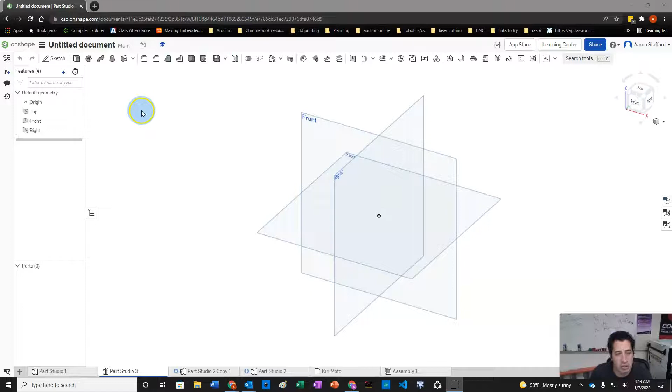Okay, so in this lesson, we're going to look at creating just a really simple object using the laser joint feature. What this allows us to do is create a type of finger joints in parts that allows us to puzzle fit them together. It's a really useful tool, and it's great for things that are made of multiple parts.

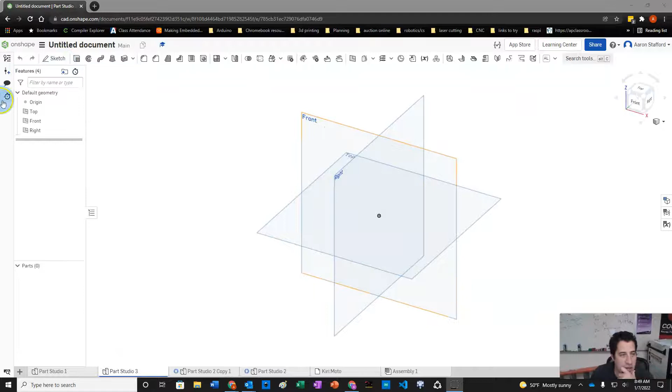And so we'll start here just by making a simple shape. Well, actually, even before we do that, we want to set the thickness of our material. So I'll create a variable called thickness, and we'll set the thickness to be 3.23 millimeters. Again, depending on the assignment, whatever material is available, I'll let you know the thickness for that one. So we have our thickness set,

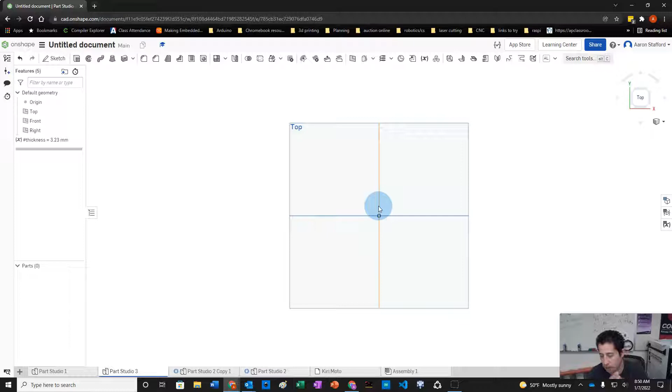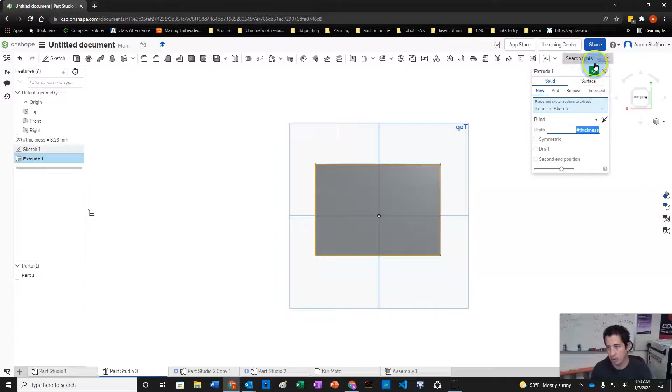and now we're going to start by creating a shape. The key here is that any place we want there to be a laser joint or this kind of box joint, we have to have the edges be overlapping. We'll do a really simple one first, just of two pieces. So we have a square, and we'll extrude that to the thickness of the material. This square could be whatever, or not a square, but kind of a rectangle.

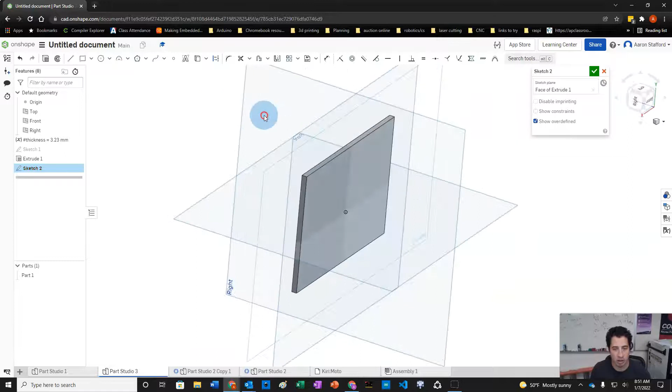What we want to do is make another piece that essentially intersects this one, and the place where they intersect is where that joint will be created. So we're going to make a sketch on this plane, and when we create the shape here, we're going to extrude it through this object. We'll make what would be a wall, facing a different way. So instead of extruding it to the thickness, we'll set the width of this, getting our dimension tool.

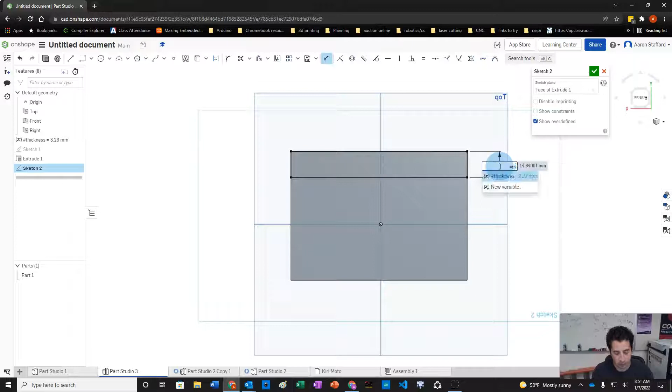We'll set the thickness here, and then from there we're going to extrude. Now the key is there's two things. First of all, it's important that we're adding a new object instead of adding, because they have to be separate pieces. These are two different parts that are going to fit together. And then we want it to extrude through that other object.

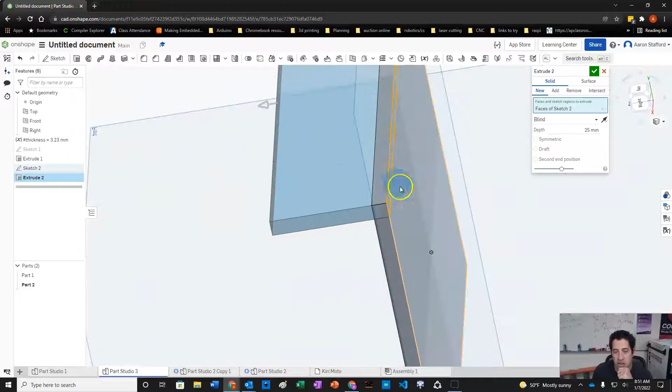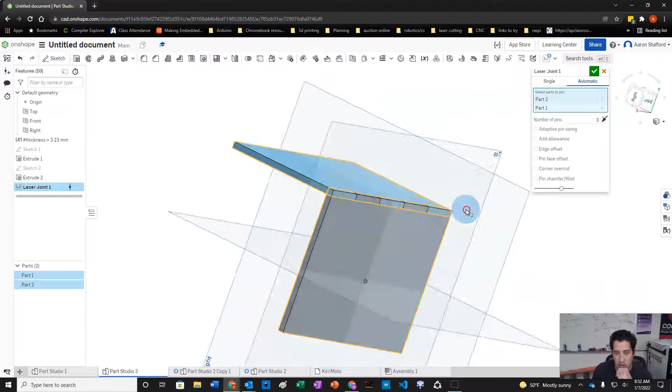So now we see that they're overlapping here, and that's the key for us to be able to do the laser joints. Now we have these two overlapping objects, and we can use our laser joint feature. We're going to choose laser joint, go automatic, and just click these two pieces. And you can see it generates those laser joints for us.

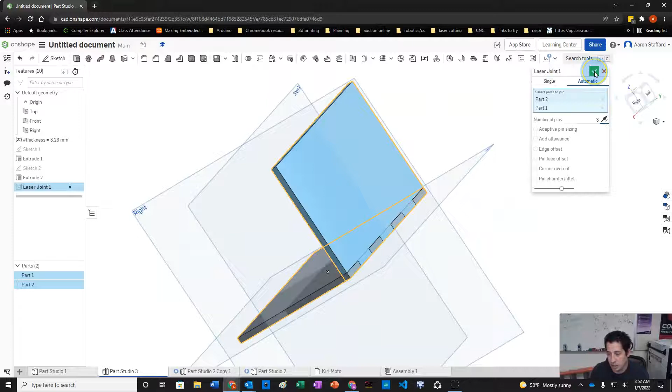We can actually change the number of pins if we wanted to, like make them really small, or bigger ones. The standard here was 3. You can also flip which one's outside or inside. Okay, and that's really all there is to it. It's maybe easier said than done.

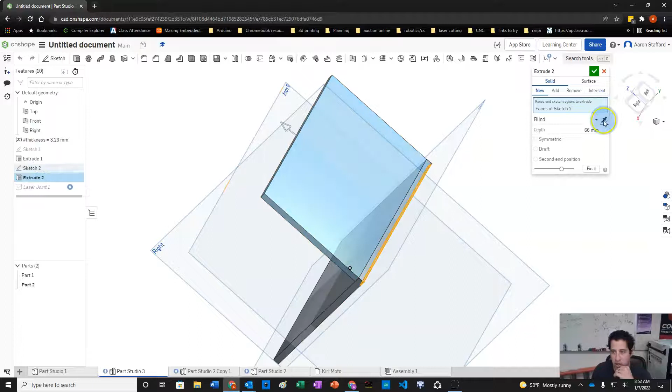Just a quick reminder, if we were to instead say add instead of a new extrude, no laser joints occur because these are the same part now. So it's really important that that happens. Also, if I extrude it this way where they're not overlapping, we also don't get laser joints because they're not intersecting each other. The laser joints can only occur in places where those objects intersect. So it's important that we get those joints in there like that. Okay, so that's two pieces.

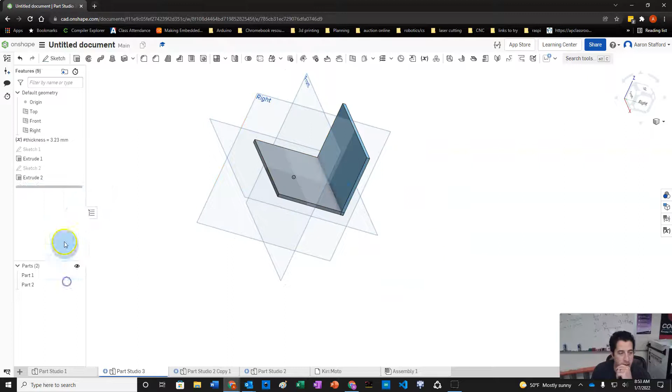Let's go ahead and back up here, and we'll add a couple more pieces. We'll turn this into a box. If I want to make this a box, I can't draw all 4 sides at once. I have to do 2 sides at a time, otherwise they're going to extrude as all one piece. And I have to extrude each side. Since it's a flat material, we have to extrude each of them separately.

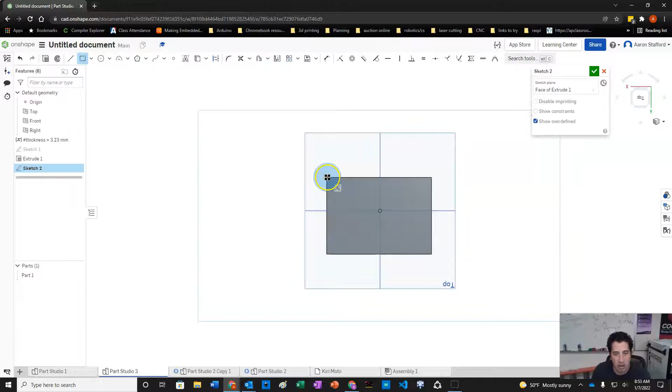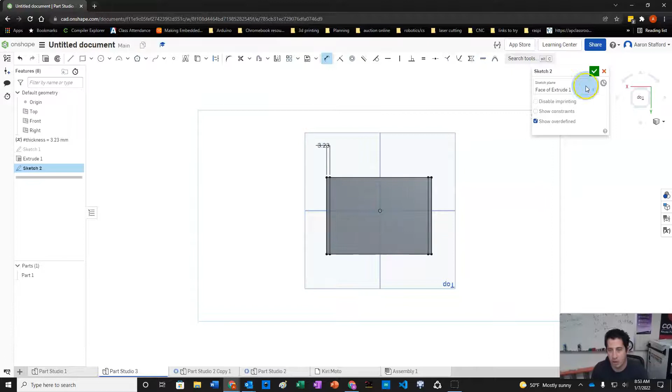So we're going to snap to the corner and snap to that corner there. We'll snap to this corner and then snap to that edge there. And we'll use the equal constraint to make each of these the same. Then we'll set our thickness using the dimension tool, press the letter D. We'll set our thickness here to be the thickness of the material. All right, and for the height of our box, we'll extrude this.

And so we want to make sure we extrude a new extrude, and it goes through. So here we see it going through the material. And we'll extrude it to a height, say, of 75. Okay. And now we have 2 walls here.

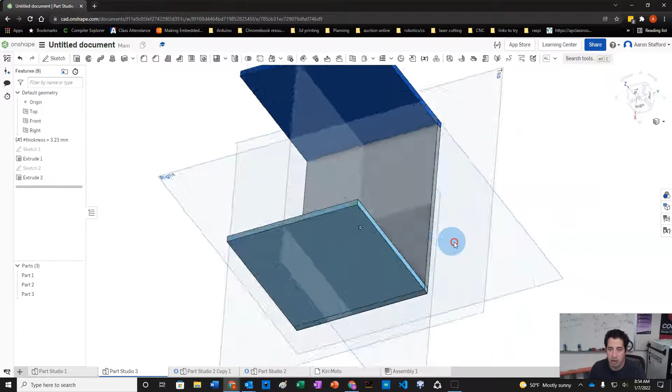Okay. And now we have to do the same thing. We've got to make 2 more walls. So I'm going to make a new sketch on the same plane. You notice I'm doing it on the bottom of the box so I can extrude through the edge. And we'll just go from corner to corner, just like we did before.

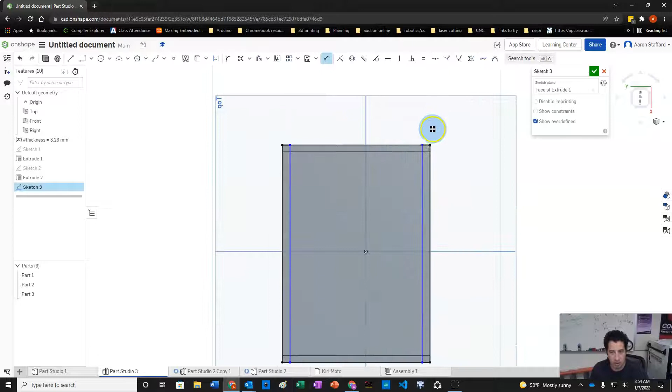Alright, we'll set these to be equal. Press the letter E to get the equal constraint. Press the letter D to get the dimension constraint. And dimension this to be the thickness. Okay, now we'll extrude this. We're going to choose selected new. We're going to extrude it the same distance.

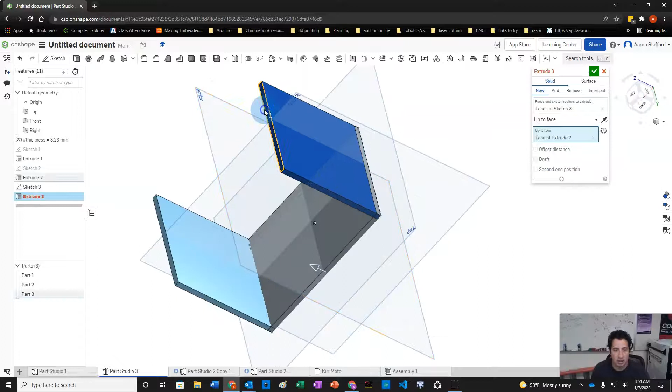Instead of setting it though, I can do up to face. And I can select this face here. Okay, and now we've got it. So we've got our little box here. We'll go ahead and add a top or a lid to our box, so it's completely closed off.

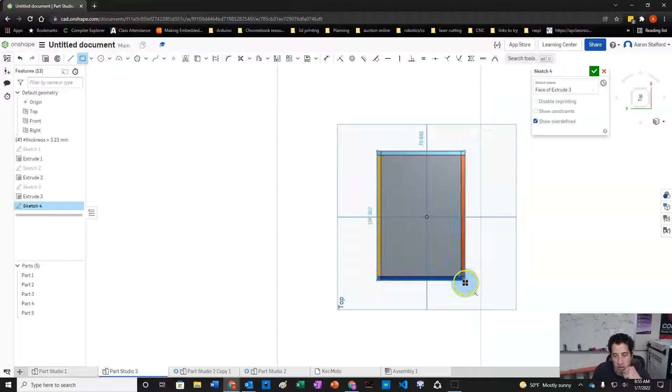So we'll make a sketch on our top surface here. We'll choose one of these edges, and we're just going to make this start in this corner and go all the way to that corner. Okay, and then we're going to extrude. We'll use the thickness here. And you see it went up, we want it to go down, so it's intersecting it. So now we have all these parts intersecting in the corners.

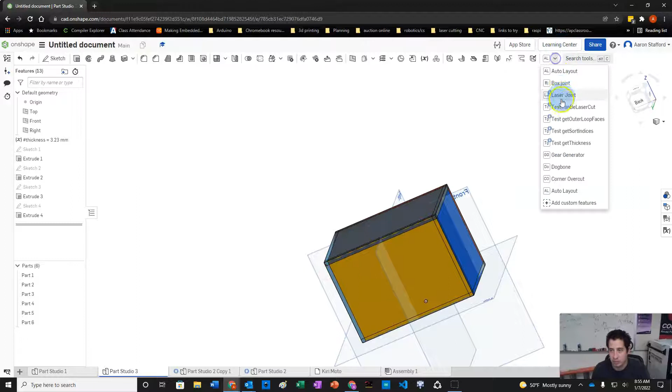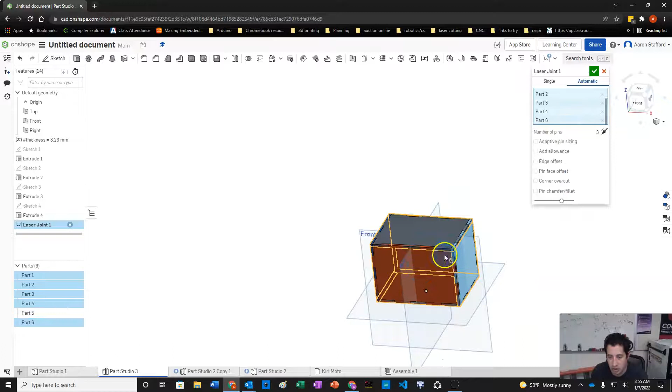And so we'll add our laser joint feature. We'll do automatic, and we're going to select 1, 2, 3, 4, 5, 6 parts. Okay, and you can see it generated those laser joints in all the parts. Now from here, if you want different edges to have different amounts of laser joints, we could deselect 2 of these faces here.

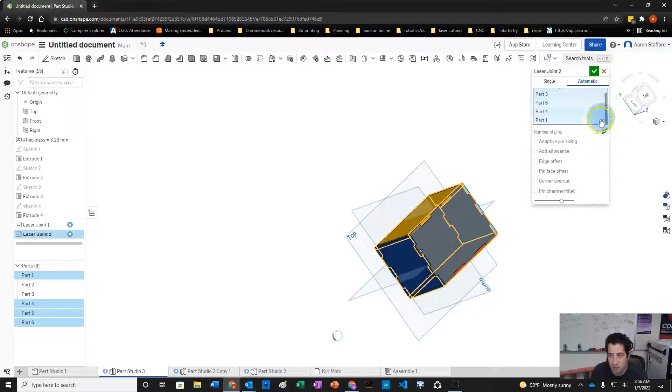And then we could come back and then do another laser joint feature if we wanted to between, maybe you wanted to have like 6 pins here. Something like that, and then you'd have to go back and create one more laser joint feature for these guys. And set it back to 3.

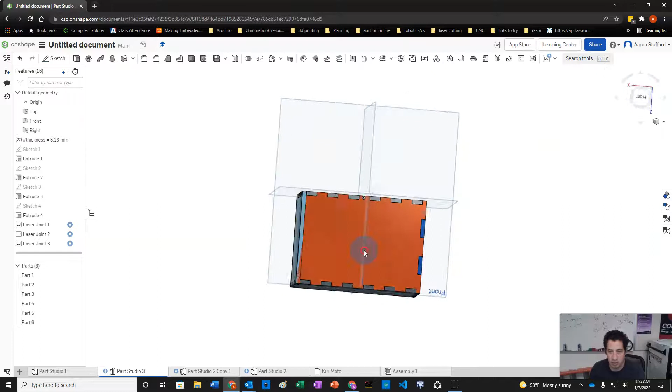So obviously that was a little bit more complicated. Did that work? I don't know if that worked. I think I lost some of my pieces. Oh, gotta do automatic as well. Okay, and there we have it. So the laser joint's done.

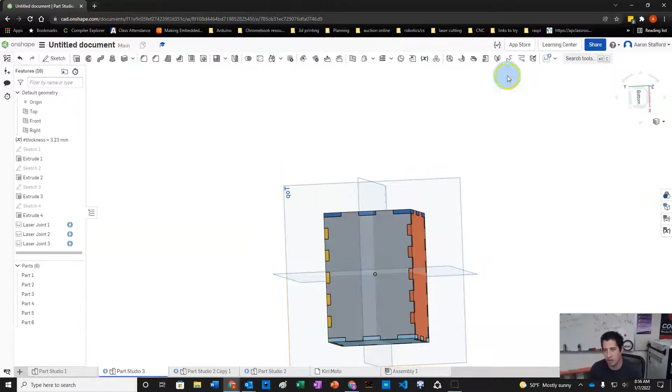Now to manufacture this, we have to lay them all flat, and this is where this auto layout feature comes in. We'll just set the cut sheet to 1000 by 1000, and the thickness we're going to set to be the thickness, and we can set the spacing. If it gives you an error, you might need to change the spacing. But now it laid it all flat for me.

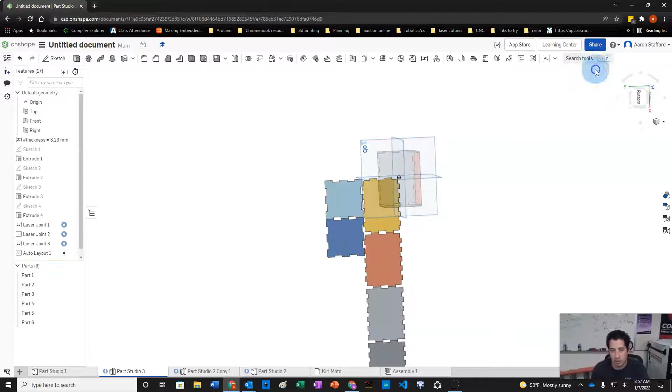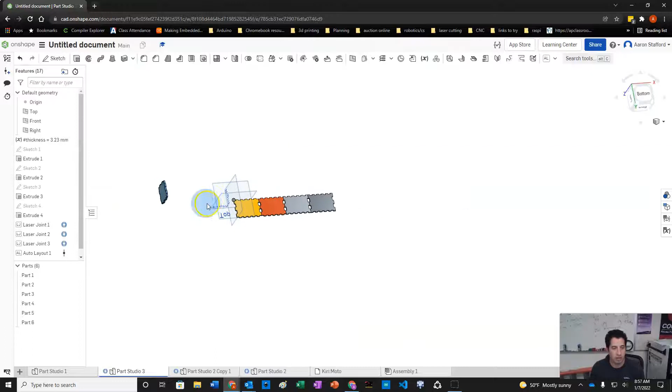And so something else that will come up here is if you have set something to be the wrong thickness, it won't behave the right way. So let's say here on sketch 2, I set this to be 5 instead of the thickness. So those are too thick now. When I do the auto layout, it's not gonna do it. It's gonna get confused with at least one of these pieces. And so if the auto layout feature is not working right, that's a clue that maybe the thickness of something was wrong, and you have to go back and fix that.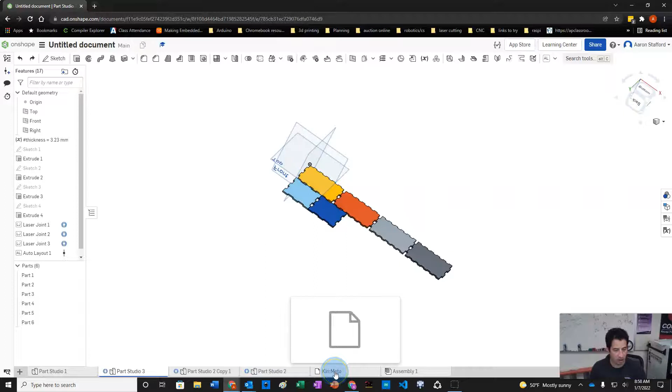Okay, so from here, we're going to send it to Kiri:Moto. I have one here added. You might have one from before, but you can click the plus, click the Kiri:Moto, opens up a tab. We'll go ahead and clear out this guy. We're set up with a laser, so our device is the laser, right? You can change that here. But yeah, we want to be under laser with the settings that we added.

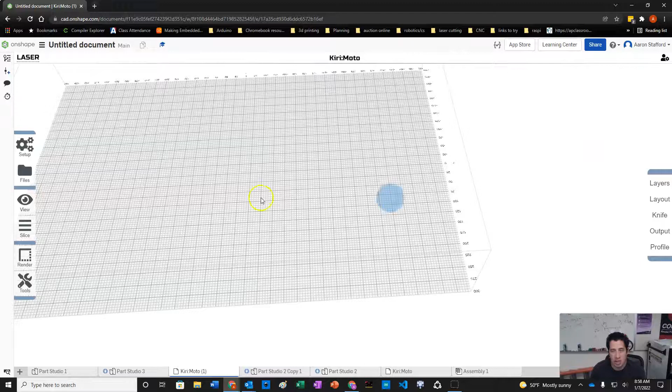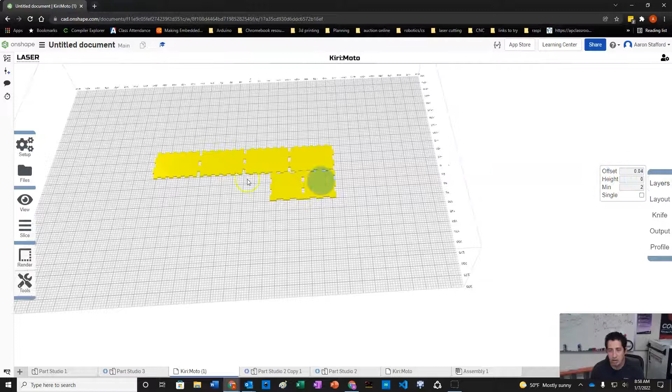So we import a file. We want to select Part Studio here, and we'll choose this one right there. So it brings out all those pieces for us. Click OK. Got all these parts here. Make sure under layers we're good to go. We have our height set to 0, and then we're going to go to preview. Looks like it did a good job. Then we can go ahead and export it as an SVG.

Okay, so you can go ahead and try making your own box with laser joints and submit that. And yeah.